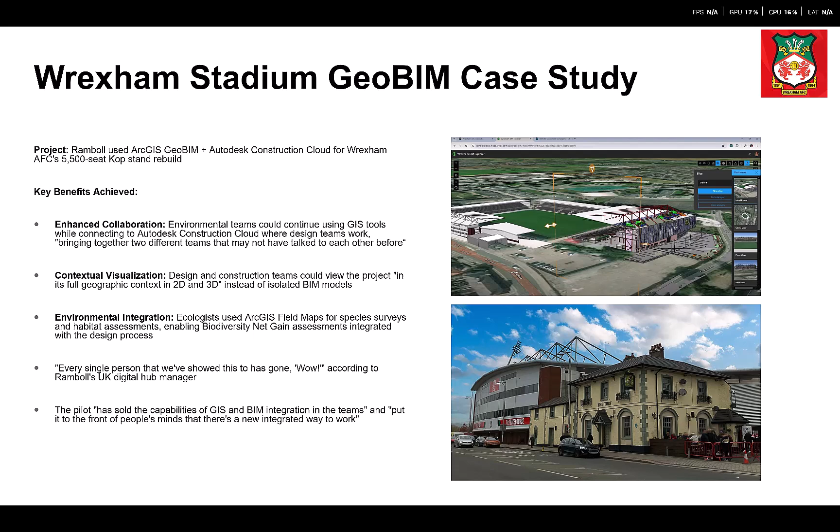And essentially what they did is they used a combination of ArcGIS GeoBIM and the Autodesk Construction Cloud to model their new stand. They saw improvements to collaboration, better visualization with context of BIM and GIS information, as well as access to a number of GIS tools with their BIM data. I won't play the video in this slide deck, but feel free to access it through the slide deck, explaining that collaboration a little bit more.

There's plenty of examples of Esri UK giving case studies of how GIS information has been useful for BIM processes. So Highways England, projects with HS2 or Skanska, using Esri information alongside BIM information from Autodesk to develop their projects. We also have a number of different examples as well. All of these on both slides you can access through the slide deck. Again, a combination of both of those worlds working together to bring about infrastructure delivery.

Okay, so we've covered briefly why that might be important, what that looks like, what some examples of that are that you can have a look at. What does this actually look like practically? So what I would say is there's plenty of ways to skin a cat. What does that mean? Essentially, that means there's a lot of different ways of doing this, of bringing GIS information into the BIM world. So a couple of ways that we'll cover today

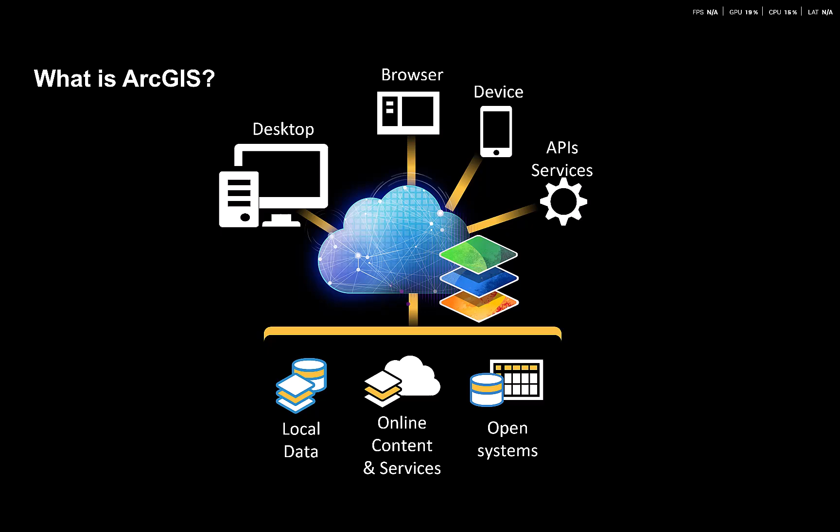Okay, so you understand now the basics: we've got the AEC collection, we've got ArcGIS, we've got the ACC. How do these all play into one another? In short, our desktop world has made connections to the Esri cloud world. The cloud here acts as a way to manage data flow between both tool sets. For Autodesk, the connection to ArcGIS was built into InfraWorks as our preliminary design tool, and into Civil 3D, which is used for detailed design.

For construction professionals, design professionals, BIM professionals, it's now easy to load GIS information from ArcGIS Online into their designs to make better informed design decisions. Using this technology, there's no need to worry about converting data formats, transforming coordinate systems, or data accuracy. So that's grabbing GIS information into our desktop products.

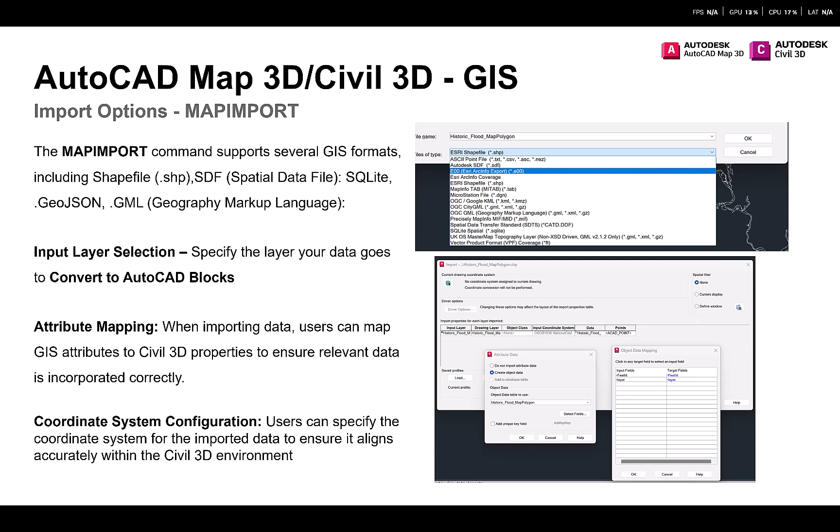So that's map import for individual files. However, if we want to connect to maybe a database, we've got the option to connect to an FDO, feature data objects import as well. So that allows us to access them databases and bring in multiple layers at once. That supports a number of different file formats, again, like shapefiles, Oracle spatial servers, SQL spatial servers, WMS, WFS, and loads more.

Again, similar to that map import we looked at earlier, we can configure the attributes of that information. We can choose what layers they want to sit on, the coordinate system of that information, but just on a much larger scale with live databases.

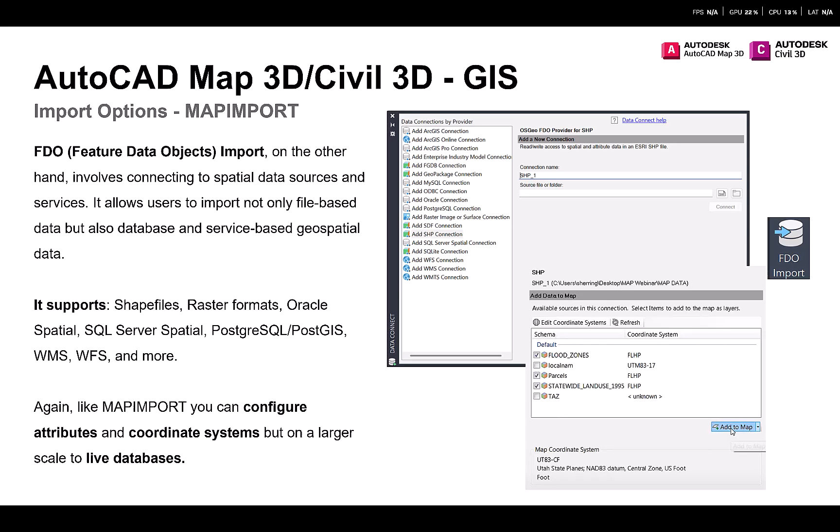And then once we've imported that information, we've got the option within Civil 3D or Map 3D to look at that GIS information through a table, pick up, for instance, maybe the individual parcels of information that we've brought in and see the data associated to them. We can also query data and set up specific rules to see the information that we need through our large data set. So we could maybe use a number of different things like if and or statements to find exactly what we need.

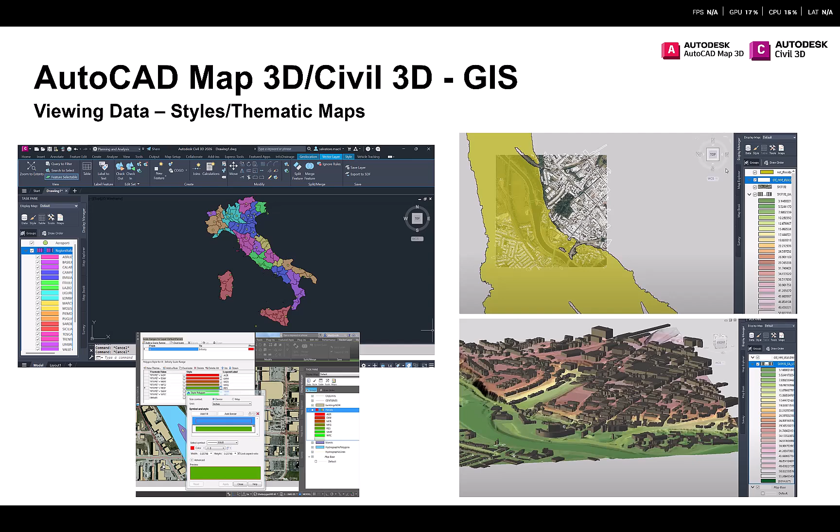So as you can see there, Map 3D commands offer a number of different ways to bring in information from the GIS world into the BIM space. We've got features within Civil 3D to import shapefiles and convert them directly into pipe networks, reading the attribute data from that GIS space.

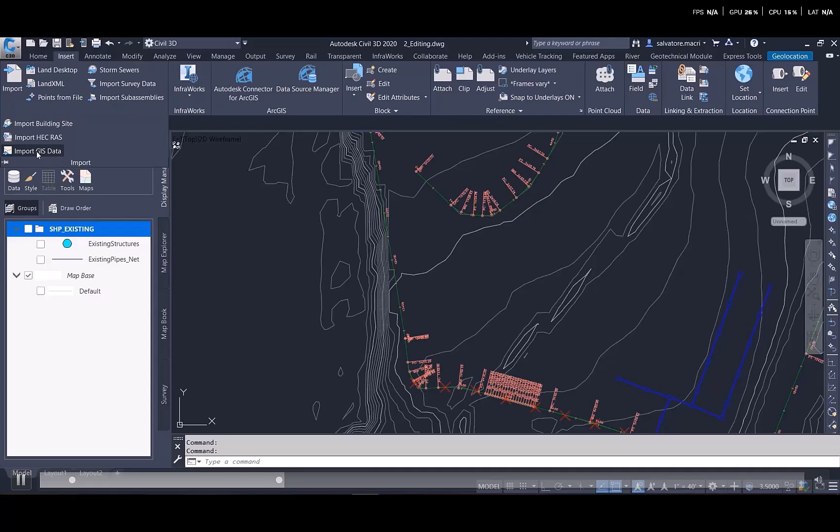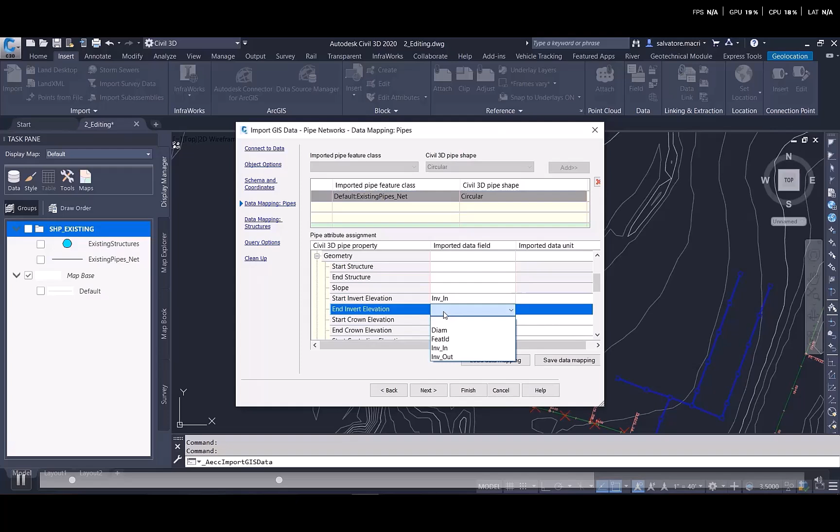So in this example, we're connecting to our GIS database, we're choosing the layers that we want to bring in, and then from that, we're looking at the data fields on that GIS layer and assigning them to the fields that our pipe network would use. So for instance, the diameter of the pipe is a data layer, which is now actually being modeled on the pipe itself.

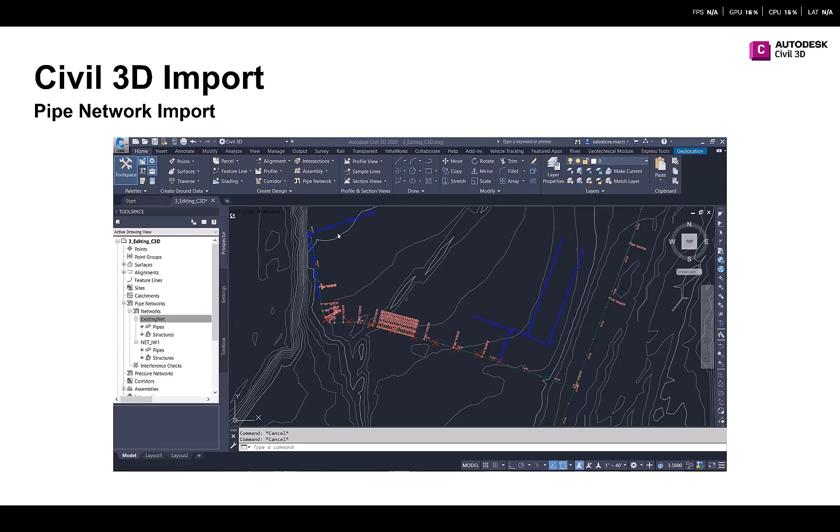So we have commands like this in Civil 3D that build upon that even more to convert that into Civil 3D objects. We've also got the connector for ArcGIS Online. So essentially this is a tool that connects to Esri's SaaS solution, ArcGIS Online. With a click of a button through that plugin, once we've geolocated our drawing, we're able to select an area on the map environment and scan it for any information that is available to us through our ArcGIS Online account. We're able to then filter between the different groups, personal content or organizational content that is available to us within that bounding box that we've created.

Select them layers then to bring in. In this instance, I'm bringing in highway boundary data. Load that into our model and choose what geometry type that we want to bring that in as. So I'm going to bring them in as AutoCAD polygons. I can preview what that information looks like on the Esri map before making the decision to import that into my drawing. As you can see, this is a massive data layer that I'm bringing in here. It didn't take that long at all.

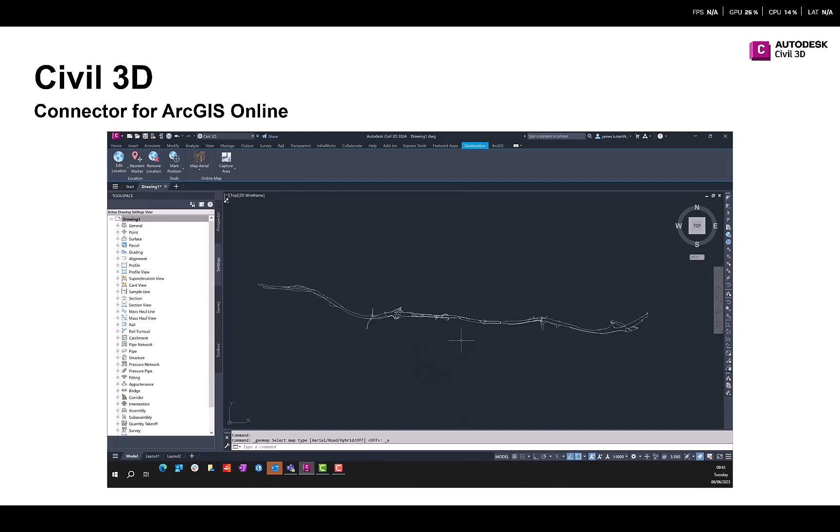You notice here now what I'm doing is looking at the import settings. You've got the option here to set up different rules to choose what layers that information sits on as well. And we'll cover that in a little bit more detail. But in short, we can bring in information from ArcGIS Online to the Civil 3D space with a couple of clicks of a button. Pretty simple.

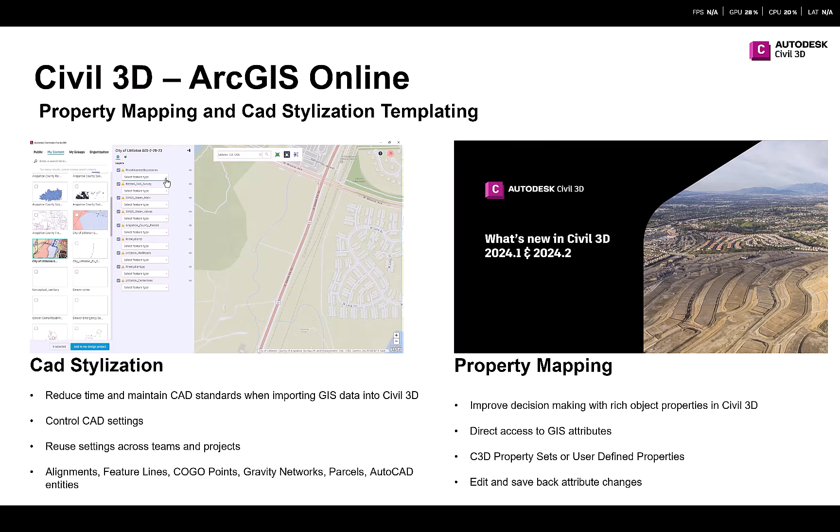I mentioned then a little bit about being able to filter and set up rules on that information being brought in through ArcGIS Online. You can see there on the left, we're looking at stylization. So we're using a number of if, or, and and statements on the data to interrogate the rules we want to place onto it. What's cool about this is essentially we can set up a JSON file with these rules based in, which a whole organization can use to standardize the way that GIS information looks when imported into Civil 3D.

And then similarly, through the same process, we're also able to filter and add rules to the property mapping that's brought across into Civil 3D property sets through the GIS space as well. Again, with the same rules. So we might want to have a rule that says if it contains the word highway, then we're going to place it onto our highway layer. Again, standardizing the way that GIS information is represented in our Civil 3D model.

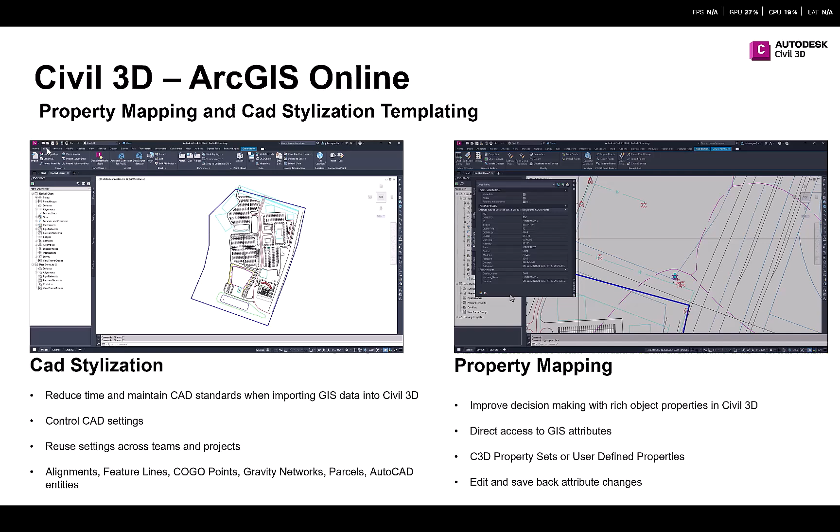We've also got in Civil 3D a number of different ways of showing mapping backgrounds in our drawing. So again, once we've geolocated our drawing, we can now show different mapping backgrounds to give our design a bit of context. In recent years, we've actually gained access to Esri mapping backgrounds. Previously, we've had access to Microsoft Bing Maps backgrounds. They're still available as well for users to use. So you can choose what mapping background you want as context for your design.

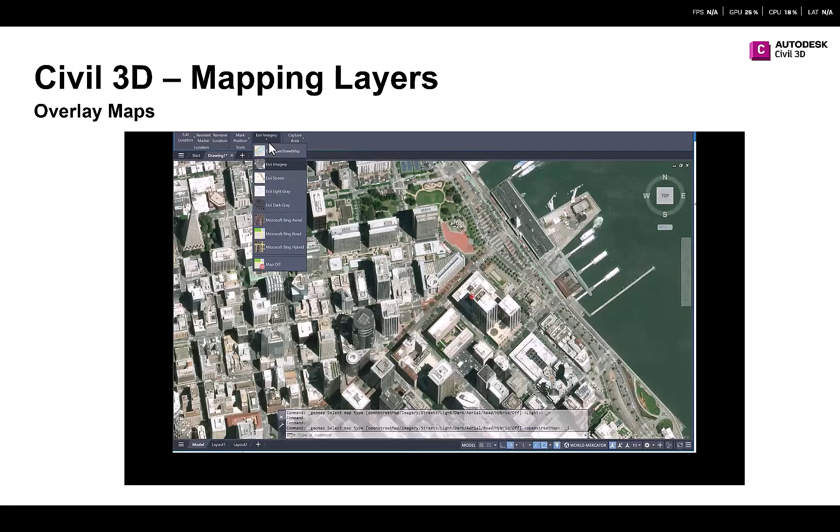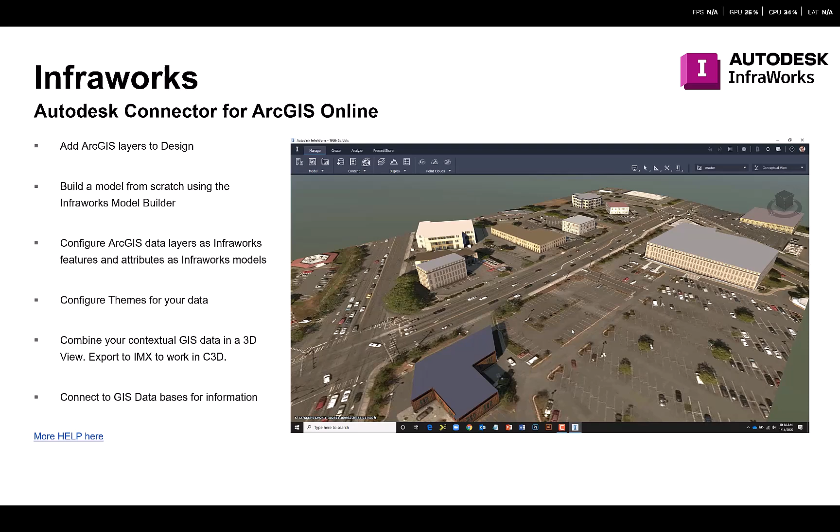That connector that I mentioned with Civil 3D, again, is also available for InfraWorks, our preliminary design tool. Very similar process. We essentially geolocate our drawing, choose the area that we want to bring that information into, choose the layers that we want to bring in, and then define how that's represented in InfraWorks. And then we can also export that information out.

Within InfraWorks, we've got the option to add different themes to our network. For instance, if we brought a pipe network in, we can add a theme to that, or surface information, we can add themes to it. We can export that information as an IMX file and use that in Civil 3D as the basis of our preliminary design.

So you're seeing here a rule being placed now on those GIS layers, in this instance a pipe network, to give it a theme. I'll skip forwards a little bit. Sorry, this is the theme being added to that data source.

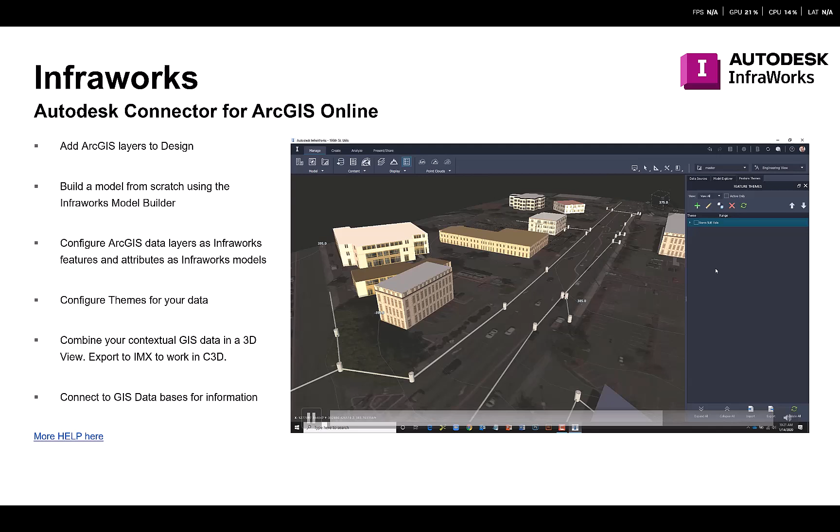Okay, another example of information being brought from the GIS world to the BIM world is a product called Esri SiteScan. So essentially, this is a tool by Esri that allows you to plan and conduct drone surveys of areas of your choosing. You're able to choose what the flight path includes, the different runs that drone takes, the angle of the photos it takes, the number of photos it takes. And then from that, it processes it into a point cloud, which we can measure, but also export directly into the ACC, which we can then process into an RCP file and view directly on the ACC.

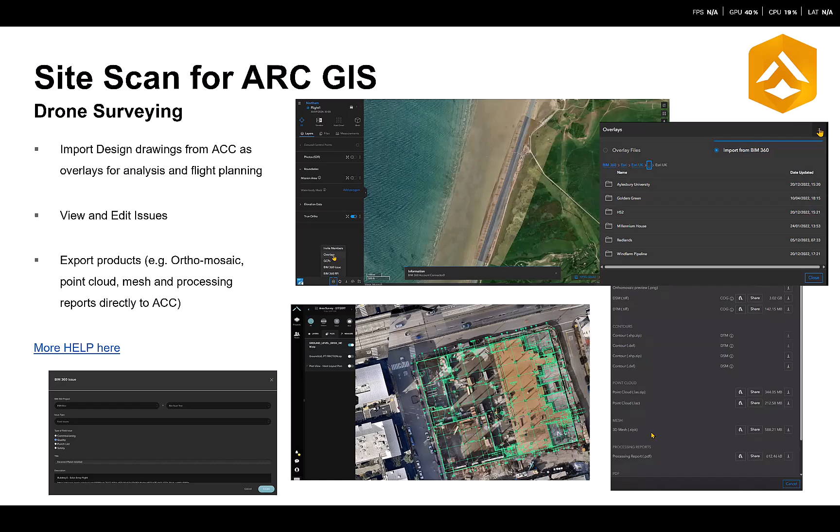I've also got a video here of some surveys that we've done internally at Autodesk, which you can check out. Again, I won't go into this in detail. It's a long video, but I think you'll get the picture of what we're doing here.

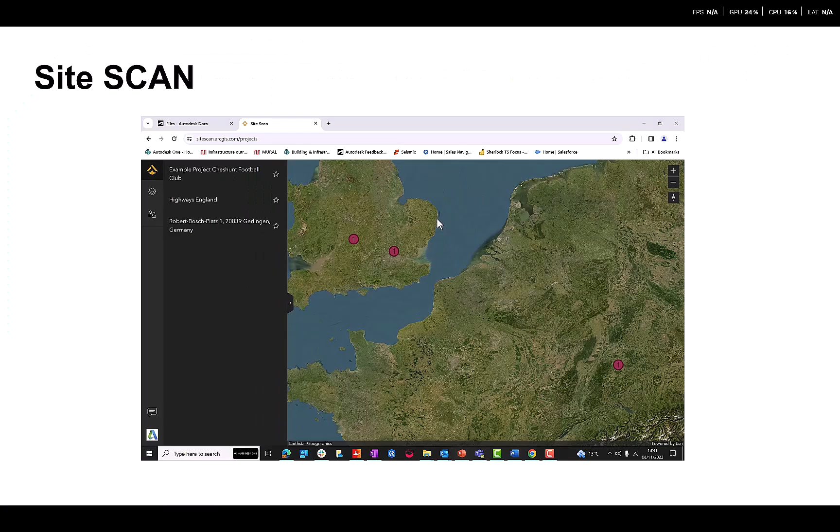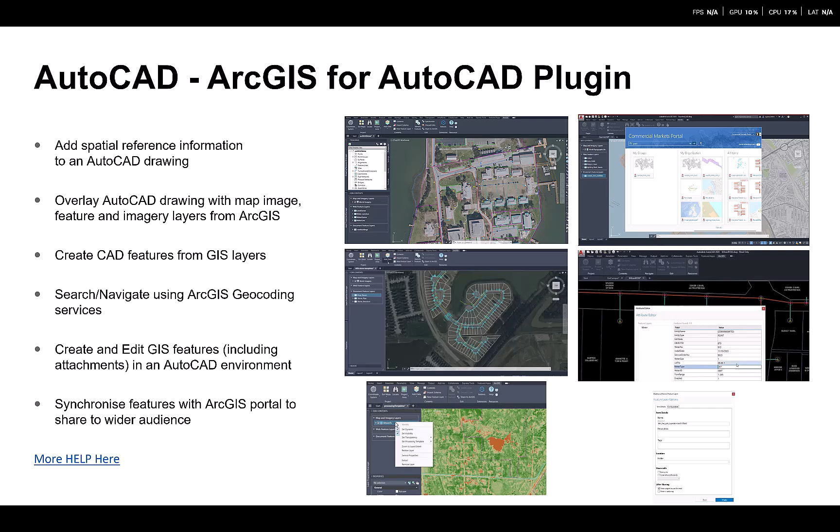Couple more ways to import information. There's also a standalone plugin for ArcGIS for AutoCAD, which essentially allows you to bring in map layers onto the AutoCAD space. It allows you to bring in GIS layers as well. A lot of overlap here between the features of Map 3D and this plugin. So definitely check it out with that link below, but I won't cover it in too much detail. Just know that it's available there for you.

One of our newer products, Autodesk Forma, a tool used for preliminary site design, is also able to connect to ArcGIS Online to bring in different data layers.

That workflow kind of looks a little bit like this. Again, similar to InfraWorks, we're able to set up an area on our map, which we need to bring data layers into, so buildings, trees, surface information. All that can be done once we've selected our area.

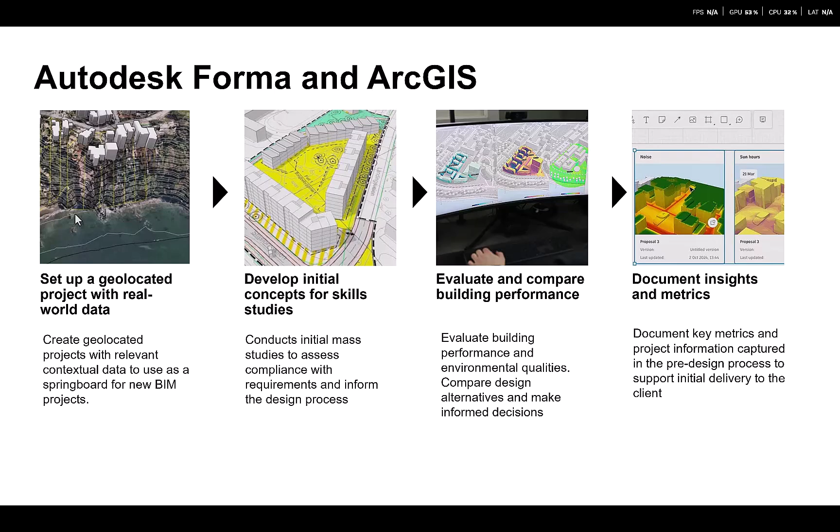We can design an initial building layout. We can evaluate it with different analyses like wind, noise, sunlight analyses, and document and publish the insights that we've got from that. All with GIS information now included in that conceptual design.

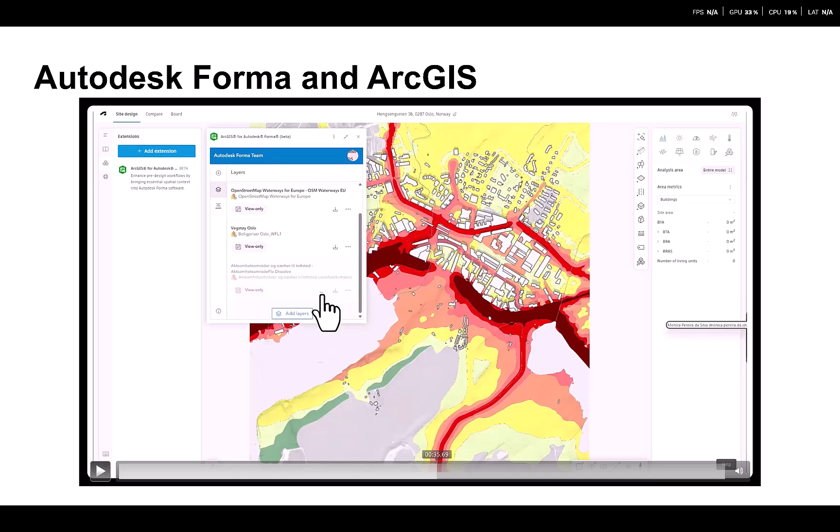Again, I won't cover this video just now. In short, it shows that process of adding that extension to our model, our Forma space, and importing different data layers into that model, using them as part of a conceptual design before publishing it to Revit.

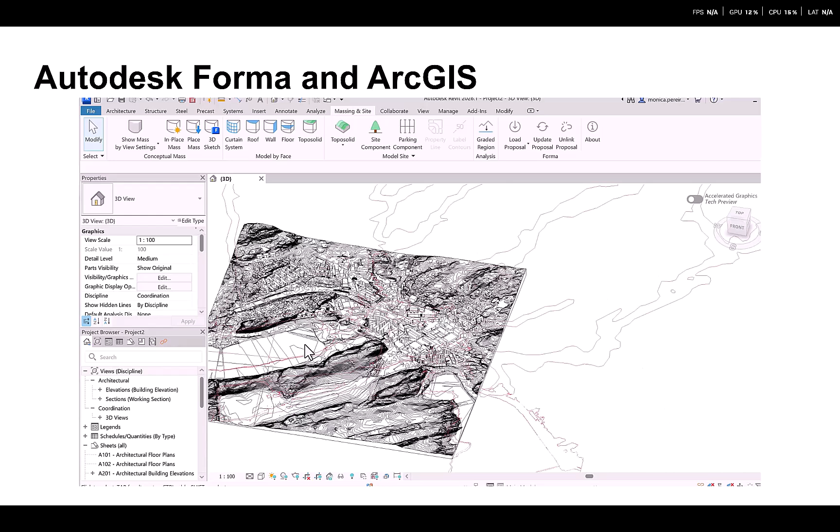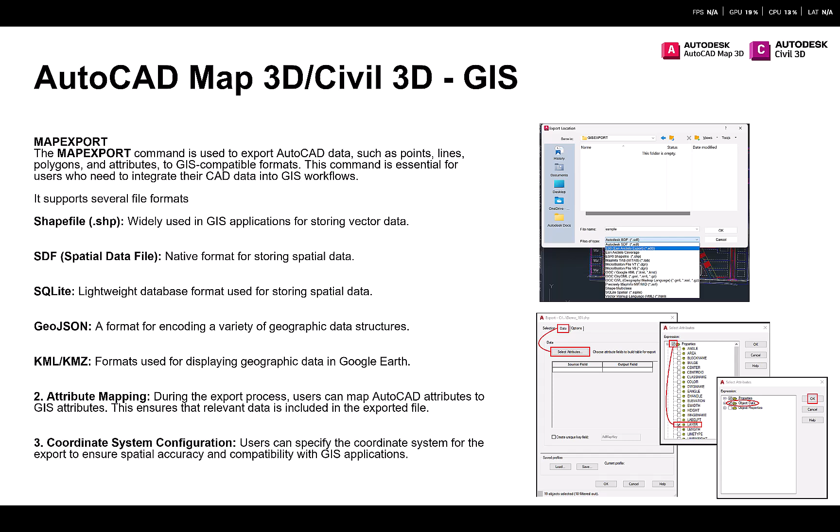And again, similar to what I showed earlier with the connector for ArcGIS Online, we have the ability to import information. We also have the ability to export information to ArcGIS Online. So this is a quick video of me using that publishing feature to select a number of different parcels within my drawing. So I'm filtering out the different Civil 3D object types I want to publish, selecting the parcels. Because my drawing is geolocated, I'm able to see that area on our Esri map environment highlighted.

I can then choose from AutoCAD what exactly I want to push, what geometry type I want to show this as in ArcGIS Online. I can then give it a name, different tags. This is useful for filtering through that information once we've got it into that Esri space. And then choosing what different area I want to publish that information to. So you can have it in your personal content, your group's content, or your organization's content libraries.

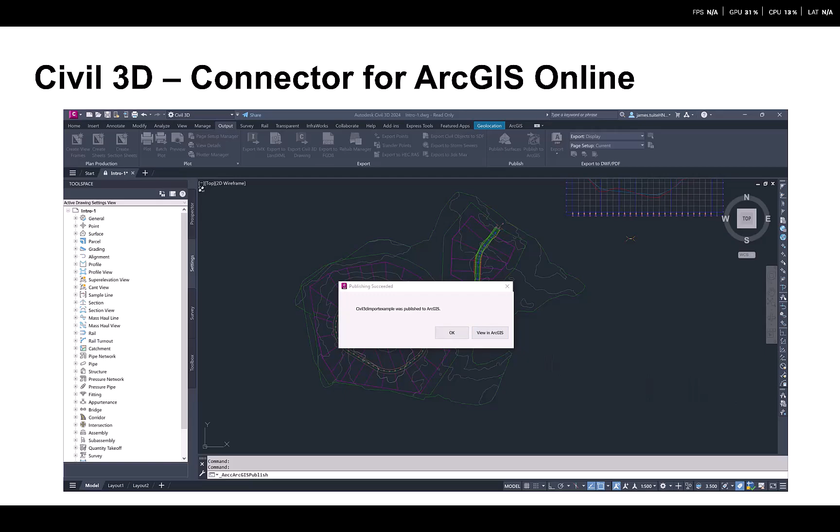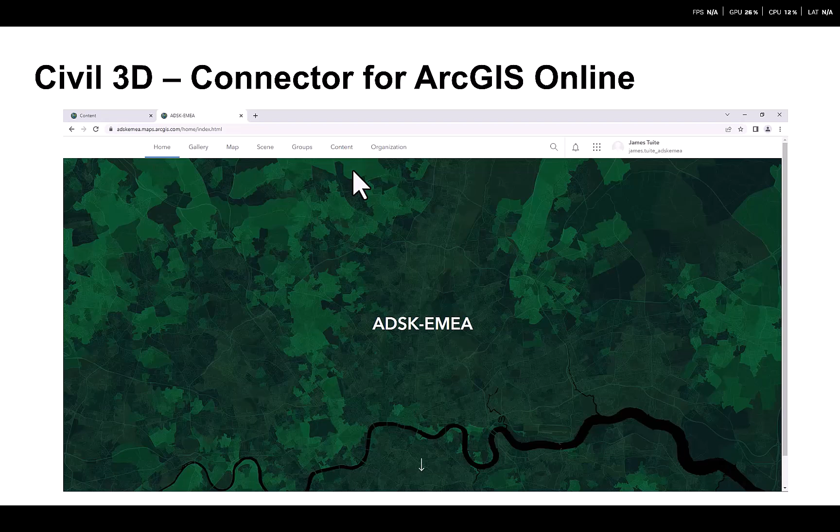You saw there, literally after doing that, click a button and it's exported out. And we've got the option there to now immediately view that in ArcGIS Online on the web browser. You can see there, all of those parcels have been brought across into ArcGIS Online. And it's available to see within my personal content as a feature layer, which then can be used on a number of different maps going forwards.

In the exact same way that we looked there with Civil 3D and that connection to ArcGIS, we have the ability to export information from InfraWorks also to ArcGIS Online. So same process, picking what object type I want to use. We have the ability here to filter between that information, choose what parts of the model we want to bring through.

And then again, seeing it in the map space, choosing the different data layers that we want to bring it across as, giving it a name, different tags before exporting to our content. And in the exact same way, you've seen there, that pipe network that I've drawn in InfraWorks, I can now view within ArcGIS Online on the map space. Again, as a feature layer, ready to go for the GIS professionals to use within their maps. Awesome.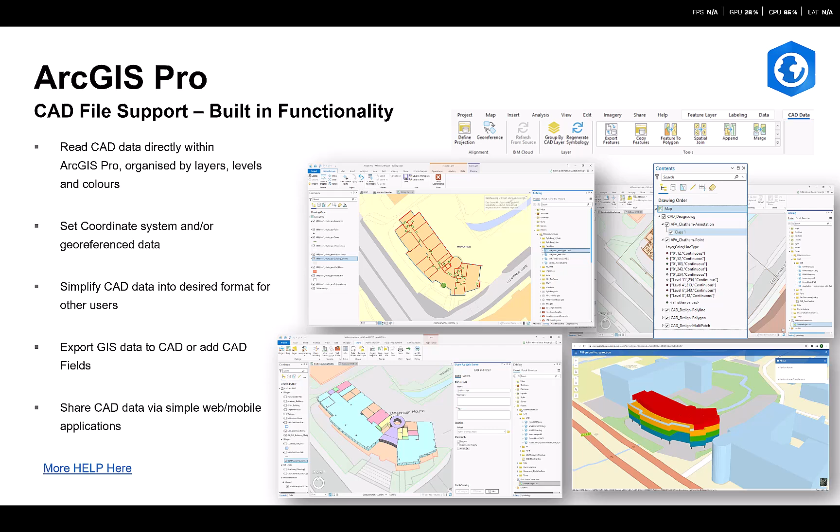It's not just for basic CAD files, it's also for Civil 3D objects as well. Things like pipe networks, surfaces, structures, parcels, all of that can be brought from Civil 3D directly into ArcGIS Pro and converted to the relevant Esri geometry type. We can do a number of different things to geo-process that information within ArcGIS Pro to make it more suitable for maps. Again, more information on that process there.

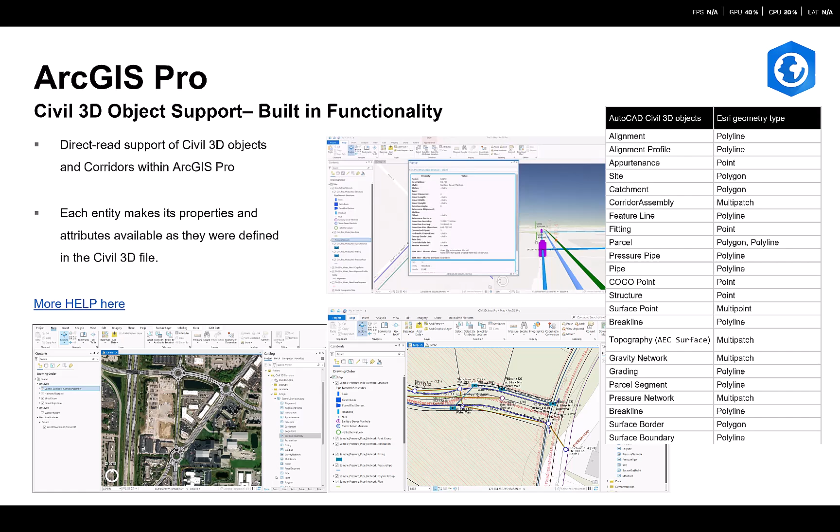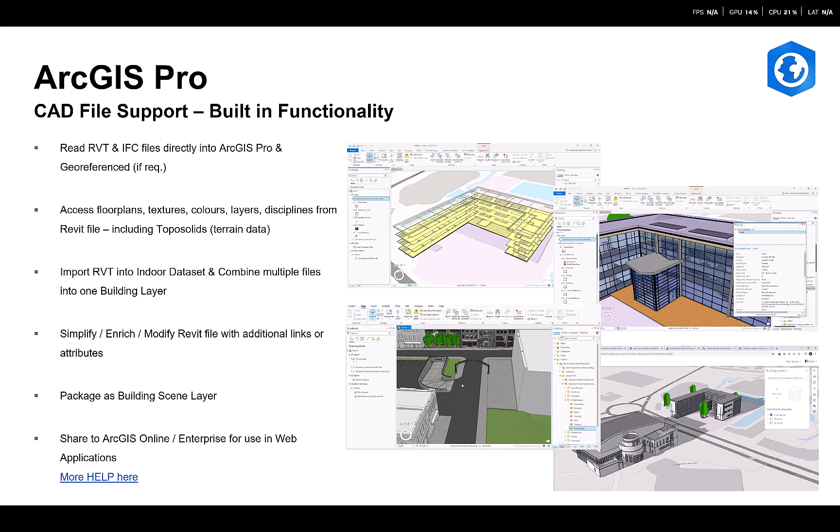We've got the option in ArcGIS Pro to import IFC and Revit files directly onto the map space as well. With a number of features now added to filter that information, to view things like floor plans, different disciplines within our building models, all within the context of that map of ArcGIS Pro. Add different links to that model and have the different data layers as packages that we can add onto different maps and show within Esri web applications. Again, more information available at the link below.

That information within ArcGIS Pro can be accessed through both local storage and the ACC. So ArcGIS Pro can ping to an ACC location, which is referred to as a BIM cloud connection, and see the folder structure of our ACC or BIM 360 project and bring in the files that we want onto their map space. Those files, once they've been brought in, have a link attached to them to the ACC location, allowing us to go to the ACC whenever we please through that link. Again, more information on that process in the help link below.

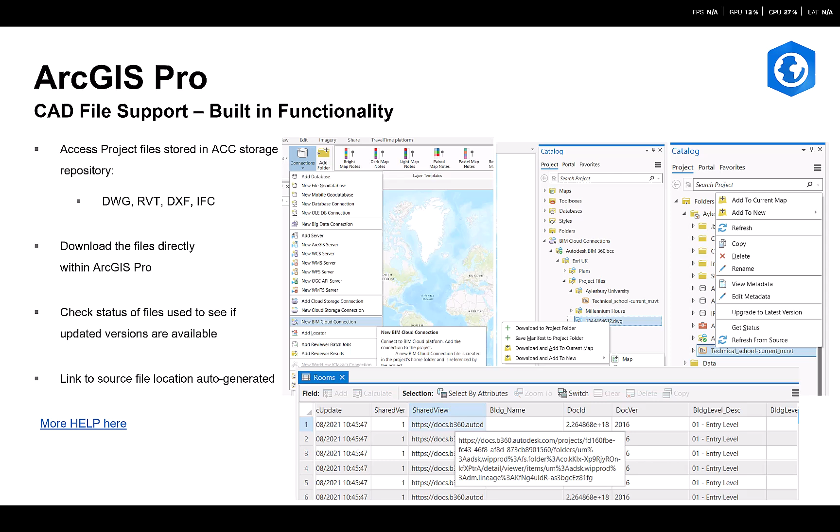For some more complex processing of information, a number of our customers use a third-party tool called FME, which is a separate software that can perform a number of different workflows through a visual programming workflow, similar to sort of Dynamo, I would say, if you're aware of that, to bring that information from one space to the next.

Okay, so we've looked at BIM to GIS, GIS to BIM. How can both of these worlds be combined into one space so we're not importing and exporting between the two? Is there a way to show both of that information in one space? The answer is yes, and it's using a product called GeoBIM developed by Esri.

So this offering transforms AEC projects with a geospatial context, allowing different users to manage risks, costs, and timelines by connecting BIM processes with location during the design, construction, and operation of large capital infrastructure projects. It enables teams to integrate and visualize project data in a single cloud-to-cloud solution, making coordinated decisions with stakeholders easy. Essentially combining the worlds of ArcGIS and the ACC together in one product.

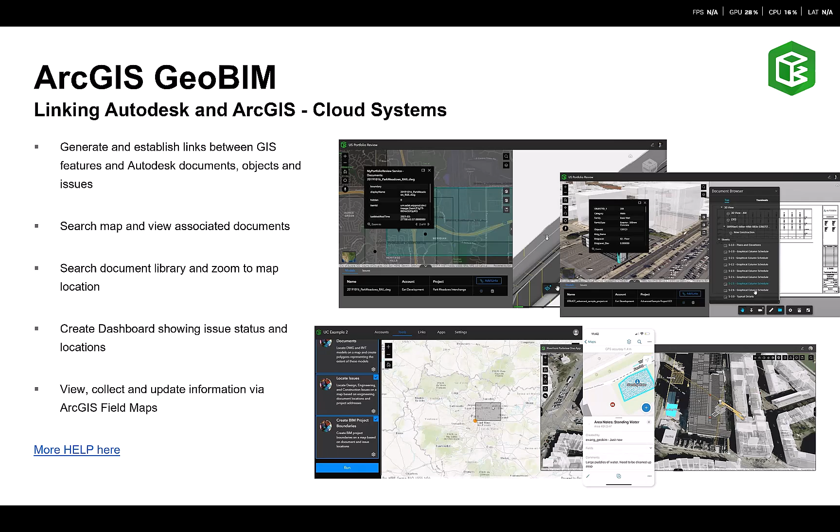This is a video showcasing what that connection looks like a little bit more. So first of all, we have our Esri GeoBIM app. We're firstly going to show what their models look like when we just initially import them into that web app space. We get these bounding boxes. Because the files are geolocated, we can see where they are. We can then see a link to the ACC model viewer of that live model and view that directly within the map space.

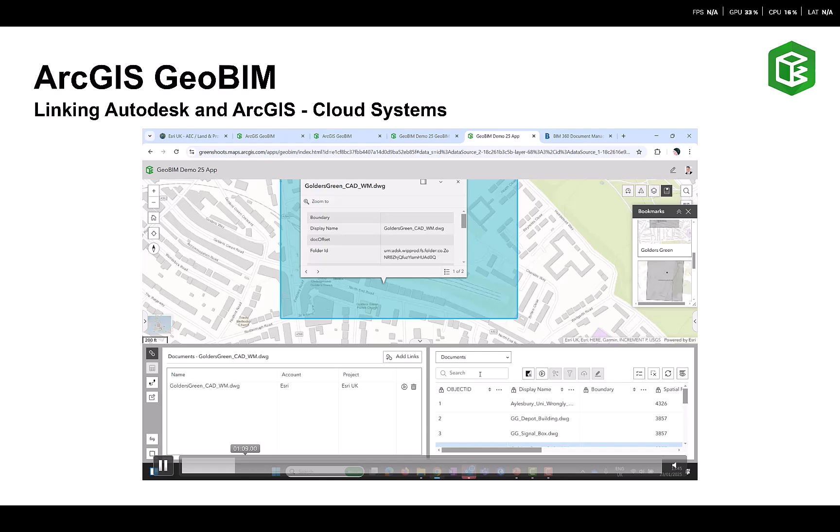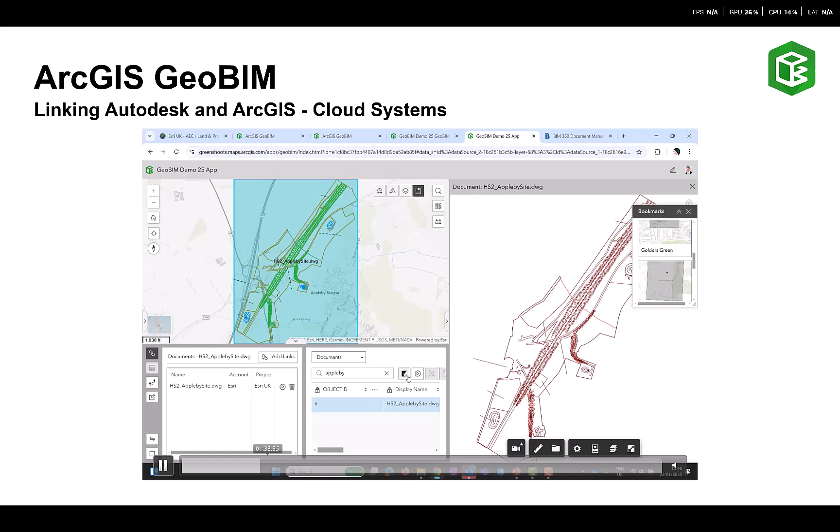Again, if I skip forwards a little bit more, you can see we're also able to import the models onto the map space as well, not just having them as bounding boxes. We can have links to the ACC location. You can see this is kind of the process of setting up that model. We can see in the GIS space other file formats like point clouds in that model space.

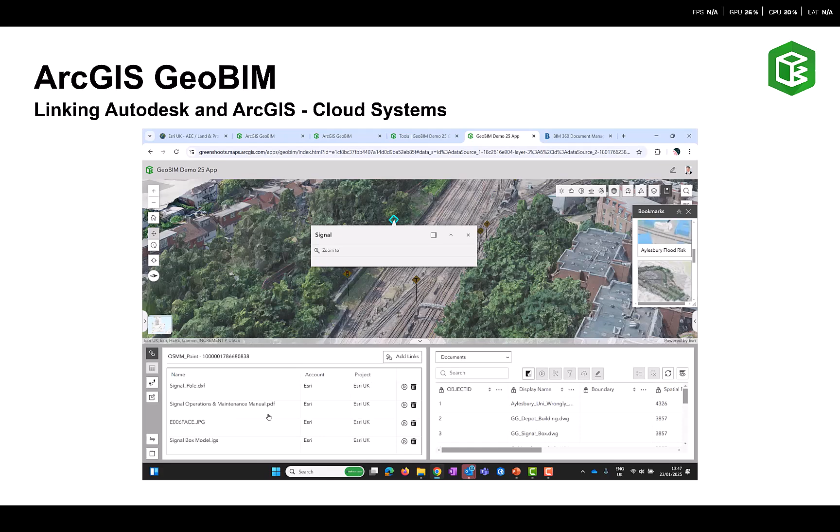You can see here in this example, we've not just linked the models, both 2D and 3D, associated with, in this instance, a light post, but we've also attached PDFs for things like O&M manuals associated with those parts. Again, these connections can be set up in that process of setting up this connection between the two platforms.

I won't go through the entire video, but essentially what I want to showcase here is that on the Esri web app space with the GeoBIM web app, we're able to have our BIM information showcased on the map space with feature layers imported if we so want to. So in this instance, that Revit file imported as a feature layer with different abilities to filter between disciplines, levels, etc.

Which is great. But we also have the ability to go to those ACC stored files and view them directly within that web app, giving GIS professionals and BIM professionals a view of all of the information they need on their project in one single space.

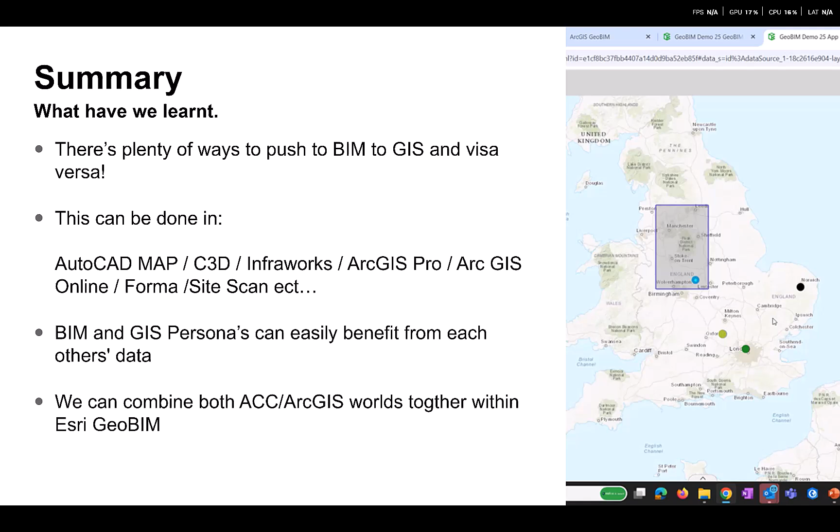We've seen that both BIM and GIS personas can easily benefit from each other's data. There's plenty of case studies showcasing this, both on our side and on the Esri side. And both of these worlds can be combined into one space with Esri GeoBIM.